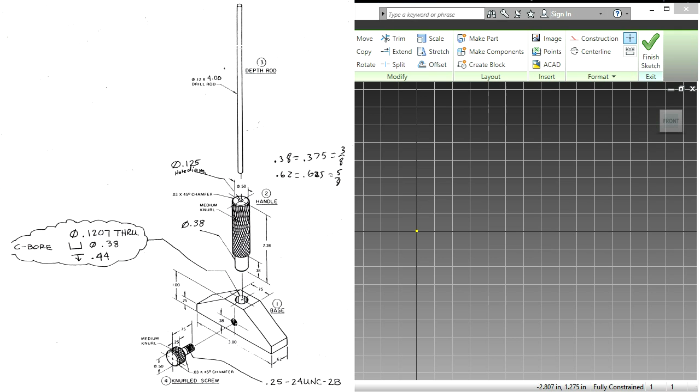A depth gauge is an assembly, so it will consist of a base, a handle, a depth rod, and a knurled screw. I'll start off with the base.

I'll make a line from the origin, 3 inches, go up 0.25 inches, and do the same for the other side.

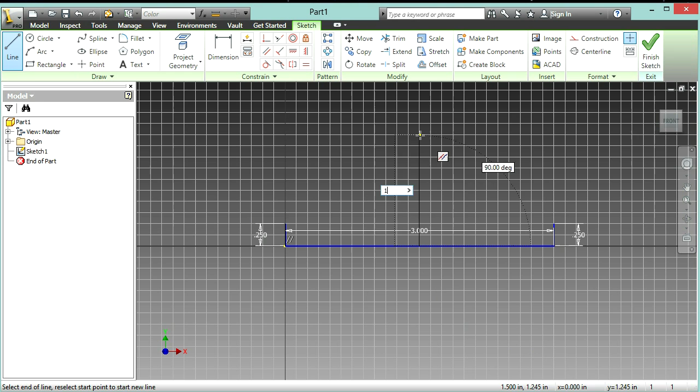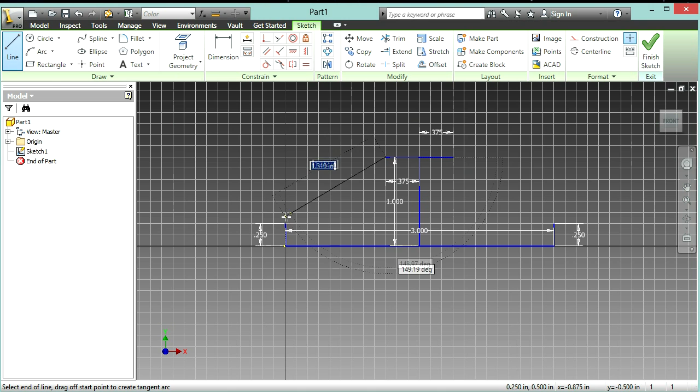Now I'll make a line up from the midpoint, 1 inch, and make a line horizontally 0.375 inches this way, and another one with the same dimension in the opposite direction. Now I'll connect these 2 points, and do the same with the other side.

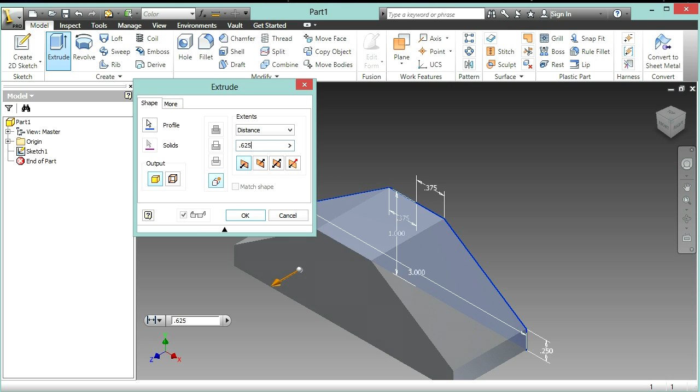I'll extrude this, select both of my profiles here, and extrude it 0.625 inches.

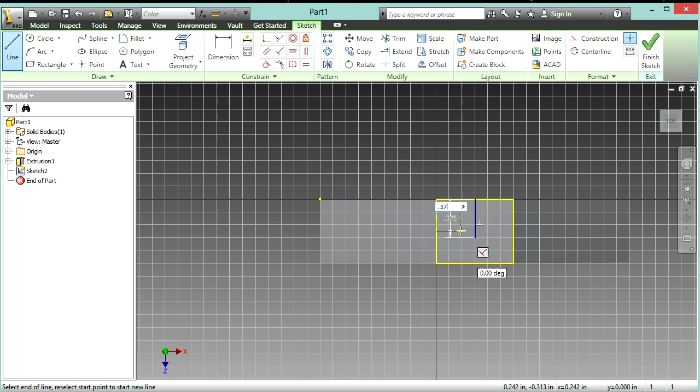Now I'll make a sketch on the top plane for a hole, and the sketch will be just 2 lines: 0.375 down from the midpoint and 0.375 across from the midpoint, and where they meet, I'll just trim this line here.

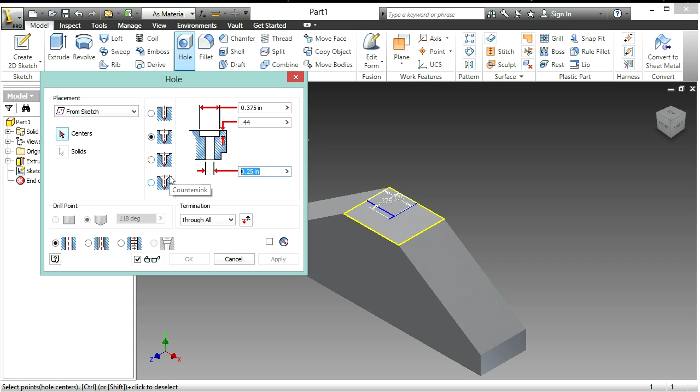Finish the sketch, make a hole. Here it'll be a counterbore hole. Select counterbore, it'll be 0.375, and here it'll be 0.44 down, and then 0.1207 on my through hole diameter. I'll select this point right here, hit OK, and as you can see, you have a counterbore hole right here.

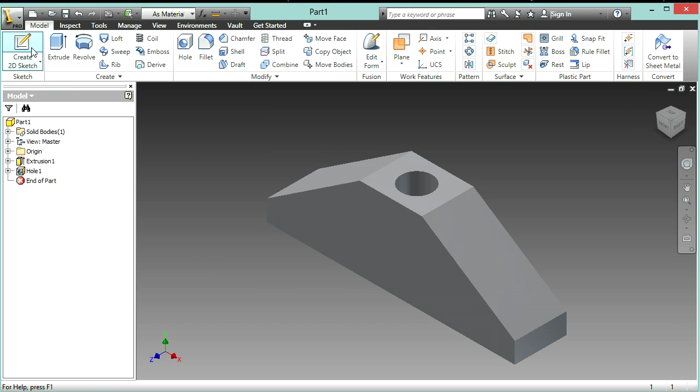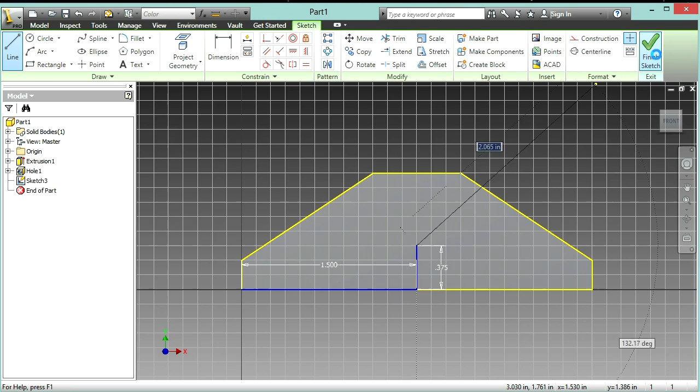Now we're going to make another sketch on this front face for another hole. For this hole, we'll go from the left side over 1.5 inches and up 0.375 inches. Finish our sketch, make another hole.

This one will be a drilled hole, and it'll have a distance right here. I'll click on this point. It'll be 0.5 on our distance and 0.25 on the diameter, and our drill point will be flat.

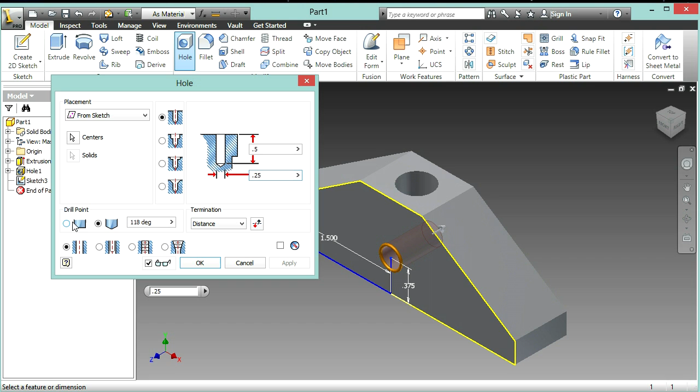Hit OK, and now we'll want a thread on the hole right here. So you'd click on the thread button under the modify tab. For location, we'll select this hole right here, and under specification, we'll select 0.25 as a size since it's a 1/4 inch diameter hole.

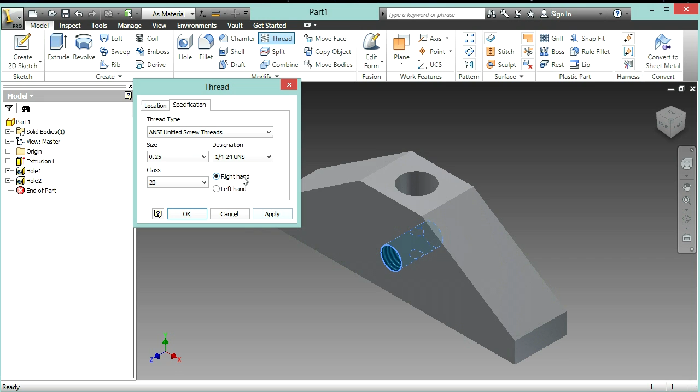Class 2B hole, and this one will be a 1/4 24 UNS, and right hand is fine with this. Hit apply, and now you have your base completed.

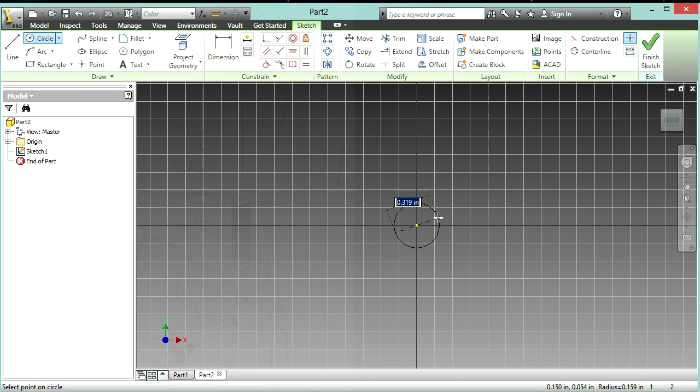So now we'll go and make another part. We'll start with our depth rod. You would make a circle that is 0.125 inches in diameter and extrude it 4 inches.

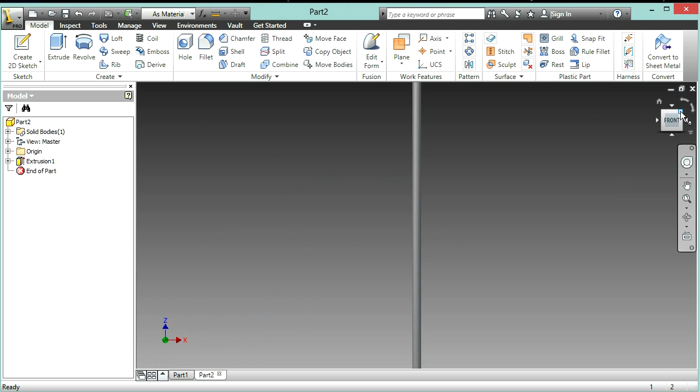I'll just make the view a bit more realistic. I'll set this as my top view, and set this as my home view, and select fit to view. So now that's our depth gauge part.

We'll create our next part, which will be our handle. To start off, we'll make a circle that is 1/2 inch in diameter. Finish the sketch and extrude it 2 inches.

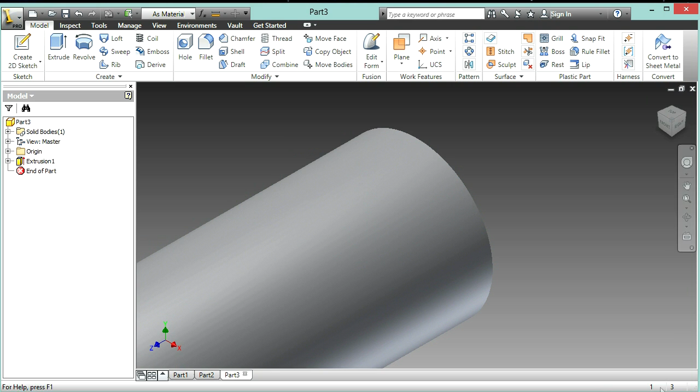I'll make the view, set this as the top view, since that's what I would want in my assembly. It'd make it a lot easier to draw. And I'll set this as my home view right now.

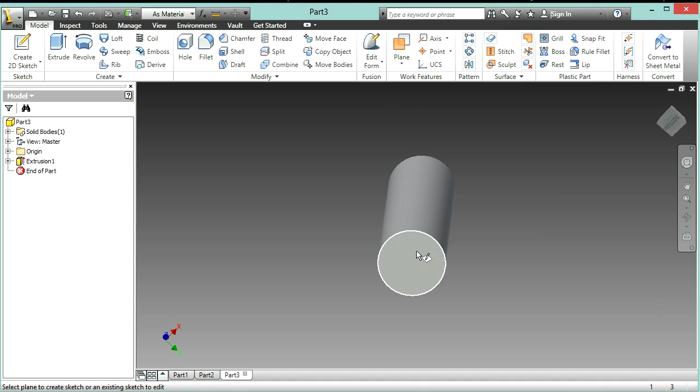Next for our handle, we'll pivot. We'll go over the cube, you can drag it down, create a 2D sketch on the bottom part of this part, and make another circle that is 0.375 inches in diameter.

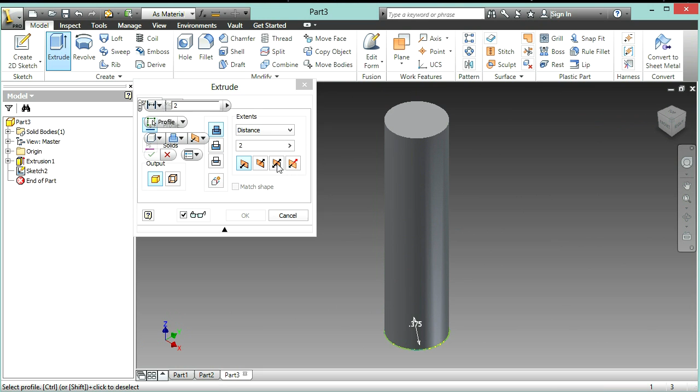Finish the sketch there, and extrude that. You'd select your circle right here, do that to 0.375 inches. So now we'll have a hole on the top face, so create a 2D sketch on the top.

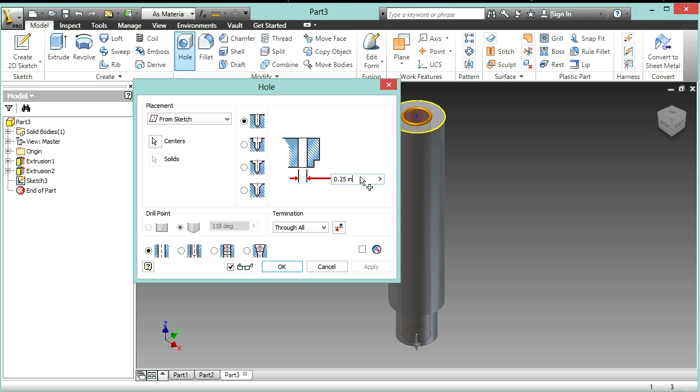We have our point right here, that will be the center point for our hole. Select the point right there. The diameter of this hole, it's a drilled hole through all, it'll be 0.125 inches.

And now we'll chamfer the edge right here. Chamfer this edge, and under distance, we'll select 0.03 inches.

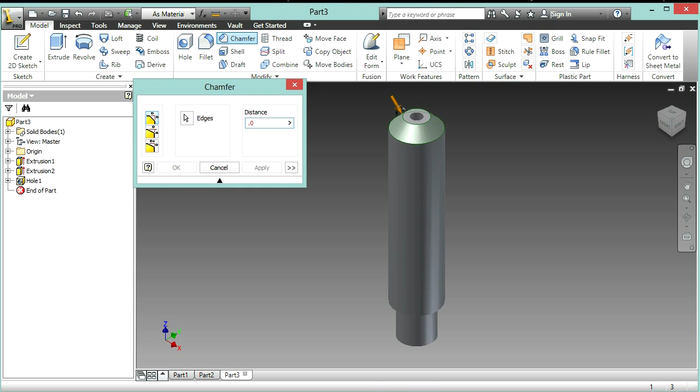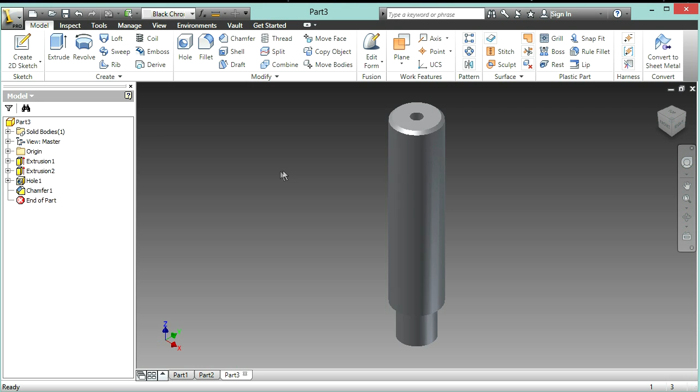And now for this part, we'll want a knurled finish. For that, we'll just select a material that we'd want. I'll have a black chrome finish for my part. Now select the face that I want, which would be this face right here.

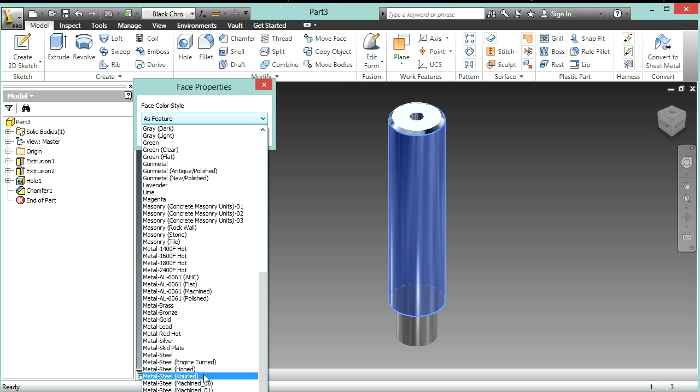Right click on it, press properties, and under face color style, you'd scroll all the way down until you see metal steel knurled right here. Click on that and press OK. You now have a knurled finish on your part.

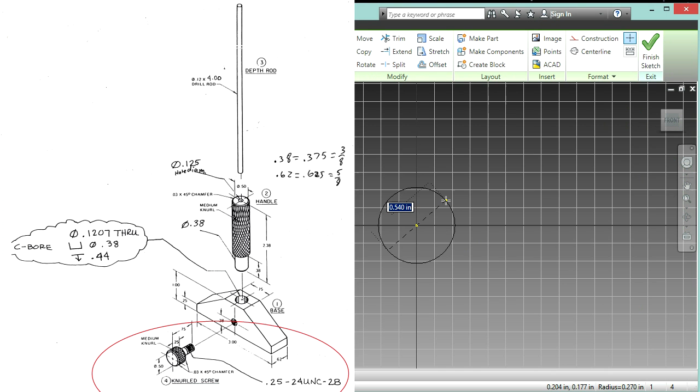And now we've completed a handle. So now for our next part, we'll create the knurled screw. For that, we'll have a circle to start off with, a 1/2 inch diameter circle. Finish the sketch and extrude it 1/4 of an inch.

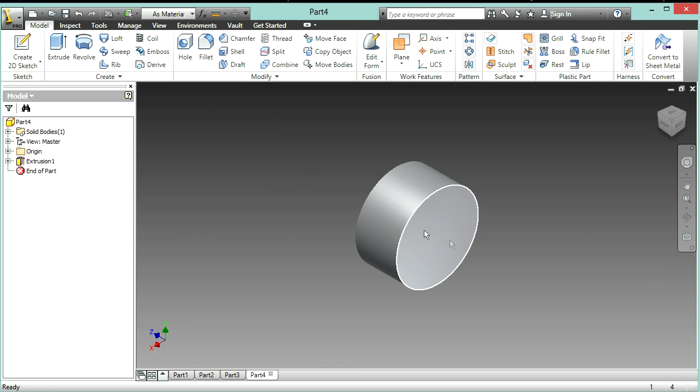And now we'll want to go over to this side, create another sketch, make a circle on the origin that is 1/4 of an inch in diameter. Finish the sketch, hit extrude, click on the smaller circle, and extrude it 1 inch.

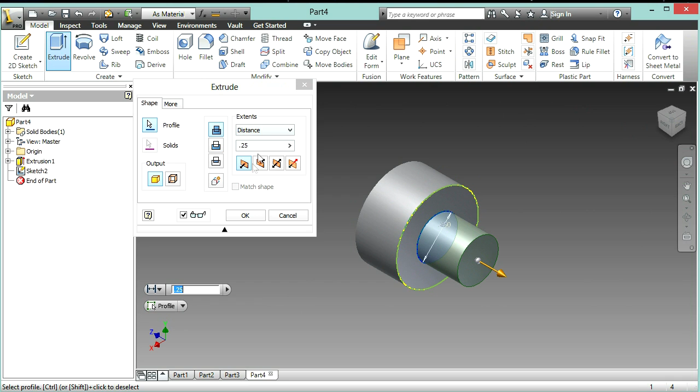Or sorry, not 1 inch, I'll edit that real quick. Should actually be a quarter of an inch. Right there.

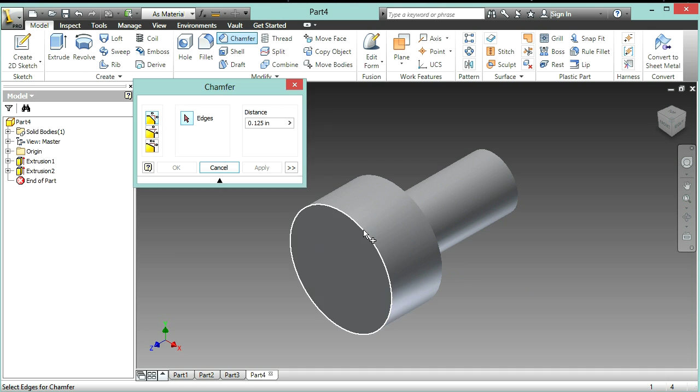And now we'll also want to chamfer an edge right here, or this face, and under distance we'll select 0.03 inches.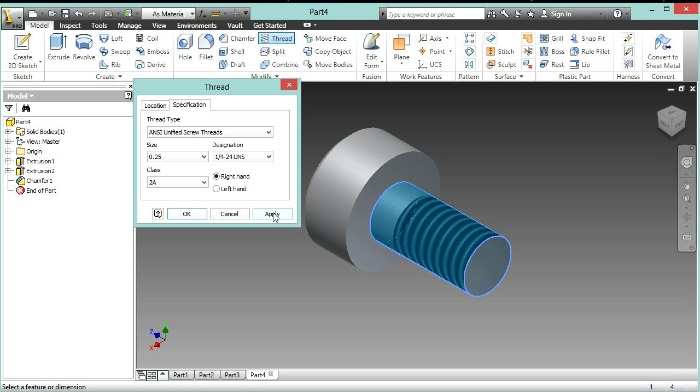And we'll also want to put a thread on this screw right here. So you could select this smaller area right here, and uncheck the full length box. I'll go over here to make it a bit easier for me to tell how I'm doing on this. For length, I'll select 0.375 inches, and under specification I'll have a 2A class 1/4-24 UNS thread. I'll hit apply, and I have my screw almost done.

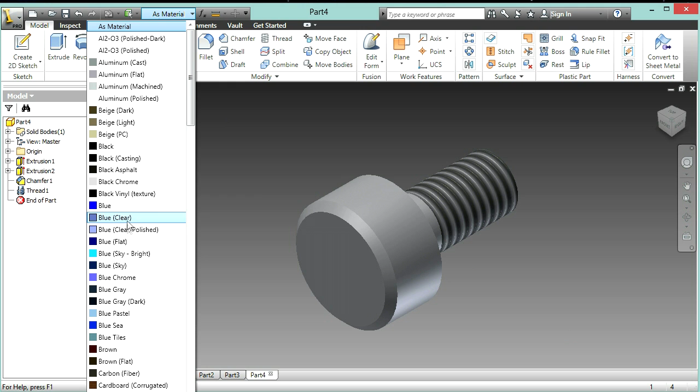I'll select another material right here, since I need to have a knurled finish on this screw. So I'll select blue chrome, and now select this face, right click it, go to properties, click on that, and scroll down till I find metal steel knurled. Hit OK. Now I have my knurled screw.

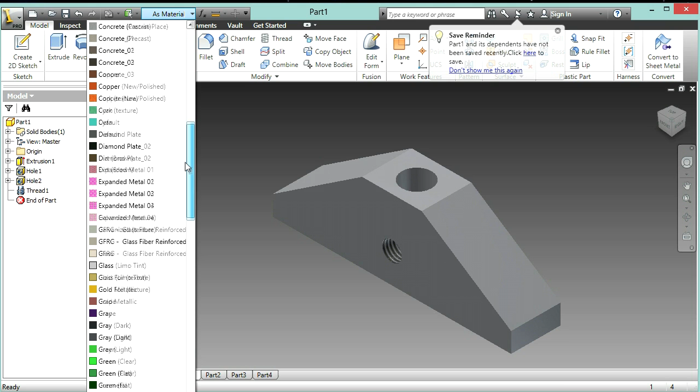And I'll just put some color on these parts too. I'll have this be a gold metallic, my base, and I'll have my depth rod be a polished aluminum.

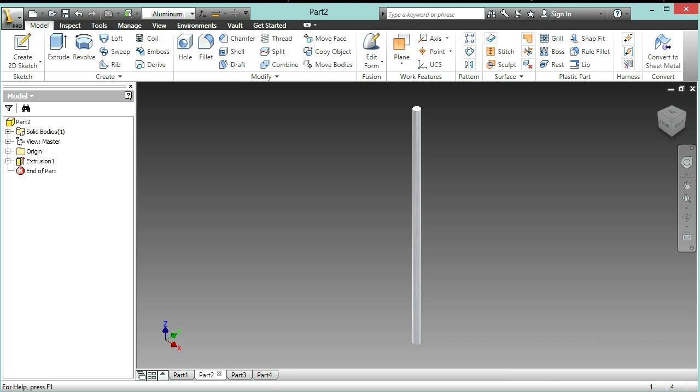And I'll go ahead and save my parts. So I'll go under the file menu, save as, or go under save, save all, and then go ahead and save my parts.

So now we'll go ahead and make a new assembly. Under the drop down menu on new, you can select assembly.

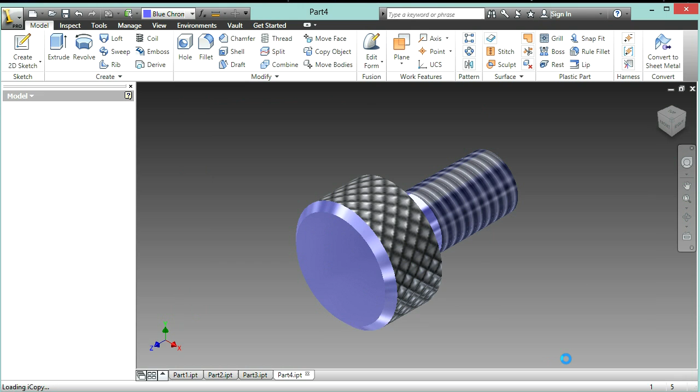And we'll go ahead and start creating the assembly, the full depth gauge assembly. So you'll hit place, select all of these parts, right click, hit done.

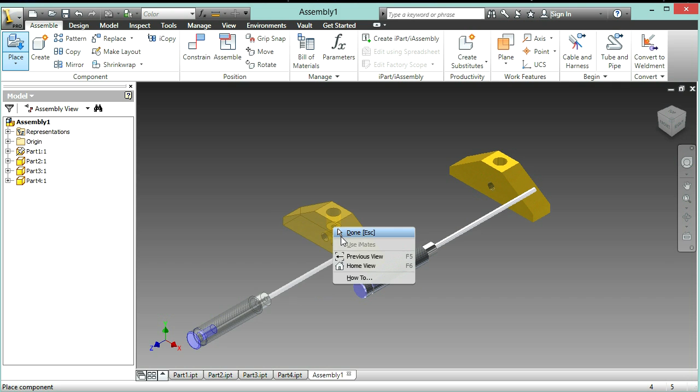So most of these parts need to be rotated. I'll just start with the one that doesn't and start mating that. So I'll constrain the constraint, constrain it, constrain the inner circle.

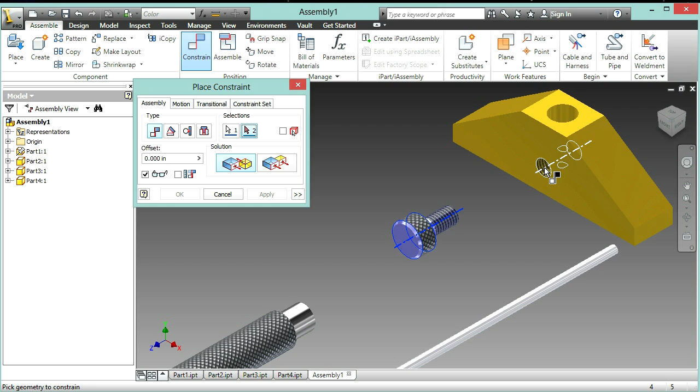You'll know when, because there's a center line in there. So I'll constrain the inner circle to the inner circle. Hit apply. I'll back out of that so I can see the rest of the screw.

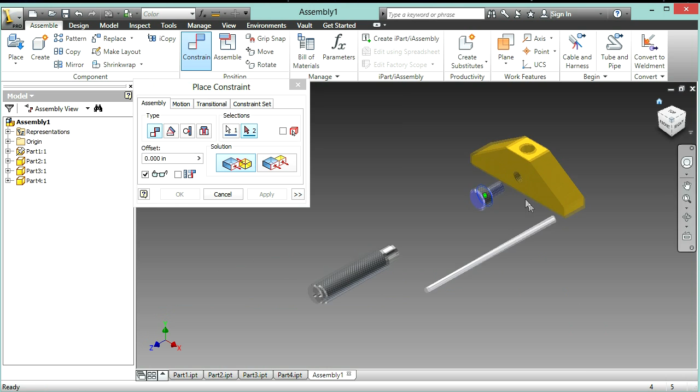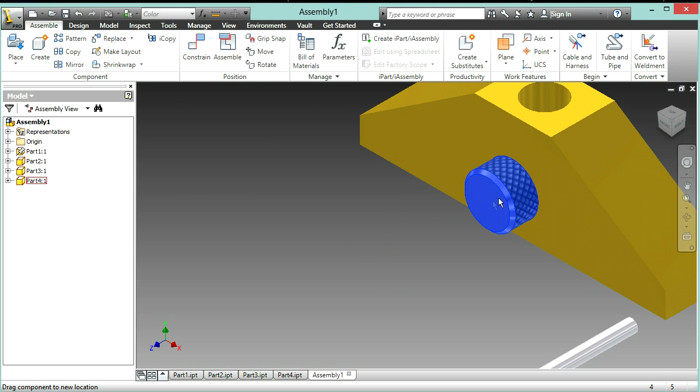And now I'll go over to the right side view, constrain this part of the circle right here to right here, and I'll have an offset of 0.125, or not an offset of 0.125 actually. I'll just constrain it again here. Don't put an offset on it.

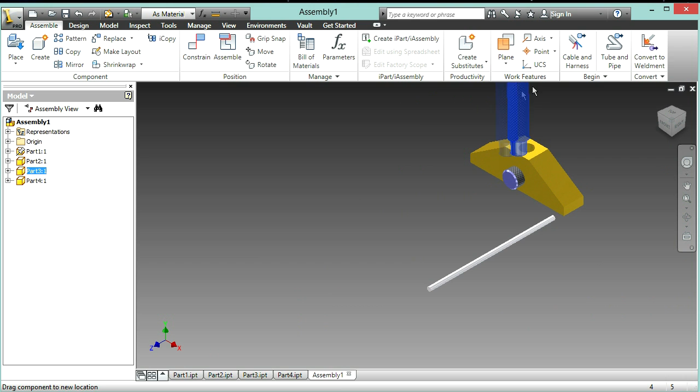And now I'll go to the handle, right click, rotate component, rotate it till it's approximately good, and I'll start doing the same kind of constraints that I did with the knurled screw. So constrain 2 inner circles, and now I'll drag this up a bit so that I can constrain this circle right here to this one.

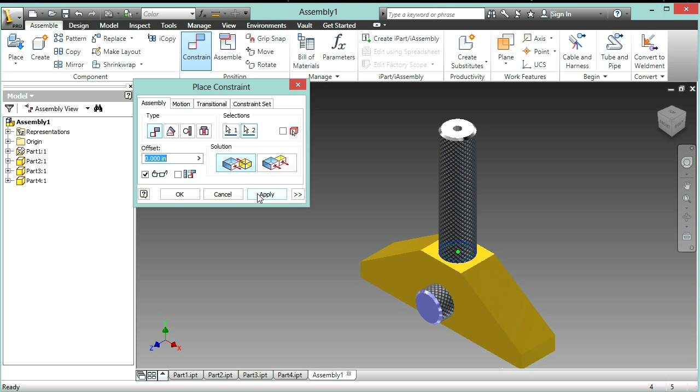And now I'll rotate the depth rod, and I'll constrain that inner circle to the inner circle right here.

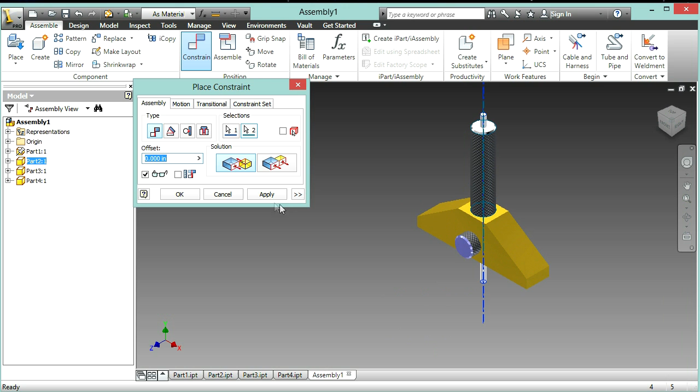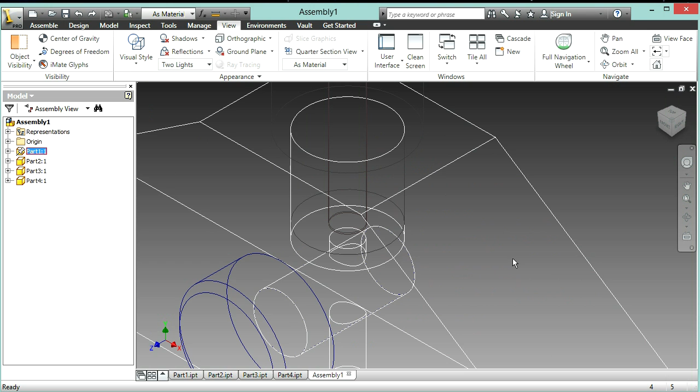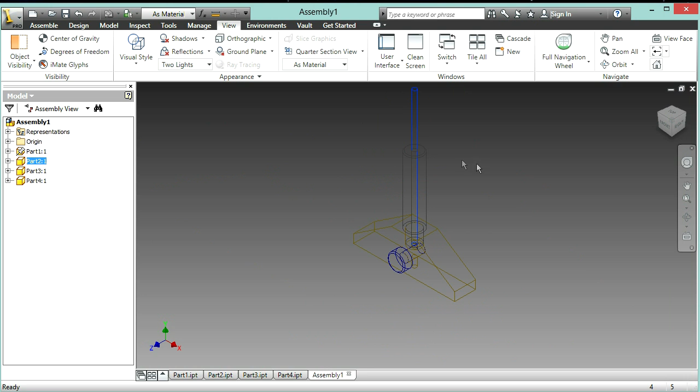And now I'll go to my View tab, and under Visual Style, I'll select Wireframe, and from there I'll drag up so that my depth gauge is not hitting the screw. This looks like it should be fine right here. Go back to my Visual Style and select Shaded, and go back to my home view.

I'll save this assembly, because I'm going to make a presentation out of it. To do that, you'll go to New, and under the drop down menu select Presentation. You'll select Create View, select your assembly, and under Explosion Method select Manual if it's not already selected, and hit OK.

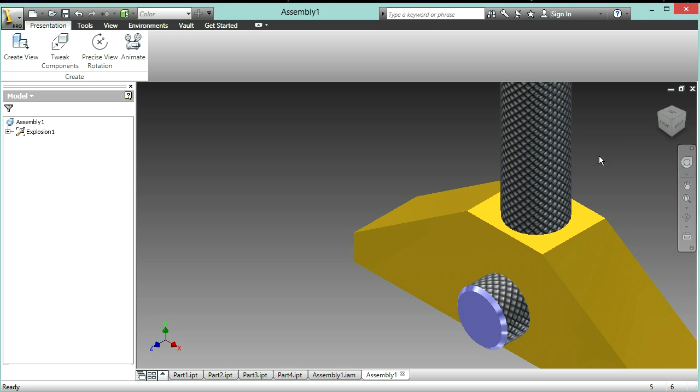And you may want to zoom out so that all of your parts are visible. And now you'd want to select Tweak Components. So I'll select my knurled screw, select Tweak Components, select my knurled screw.

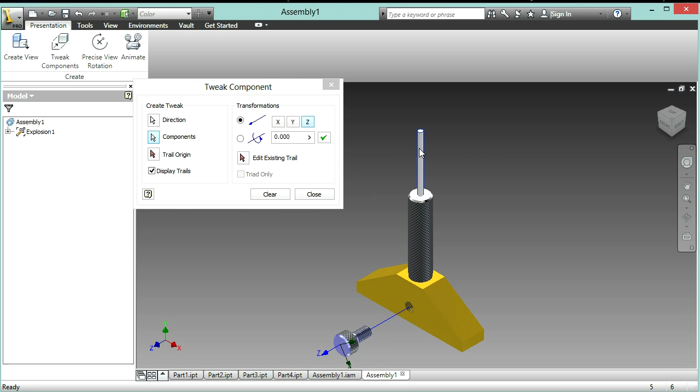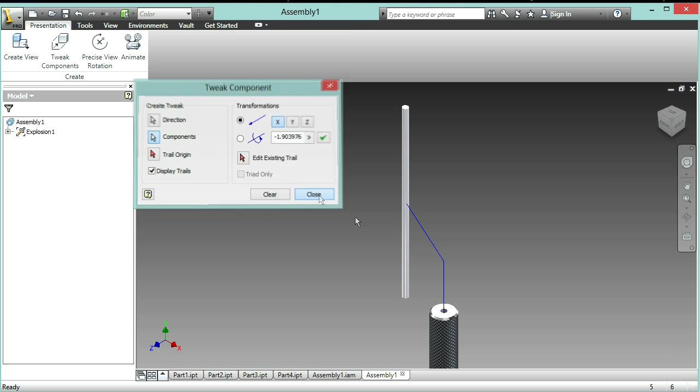Drag it out, and I'll drag, hit close, select Tweak Components again, drag this up and out, hit close. I'll go back to my home view, hit Tweak Components again, and I'll drag this.

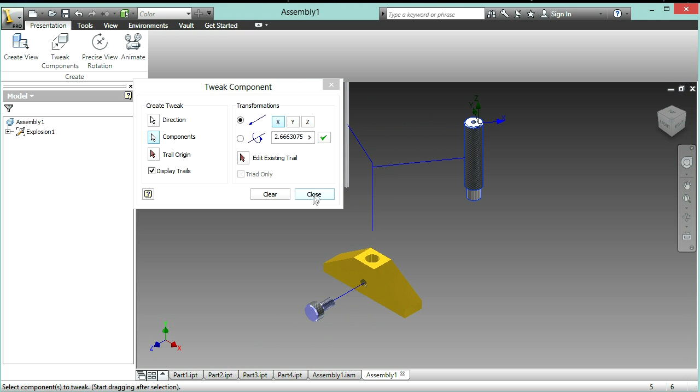You'd have to select the right face, so you drag it up, and now I'll have a transformation on the X direction to the right. I'll hit close, go back to my home view, and now you can select animate.

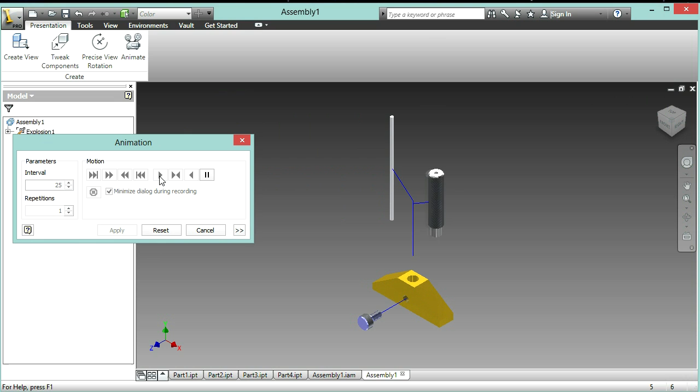I'll drag this over so that you guys can see the presentation. Hit play forward, and as you can see, it's all going into place. The depth rod is now coming in.

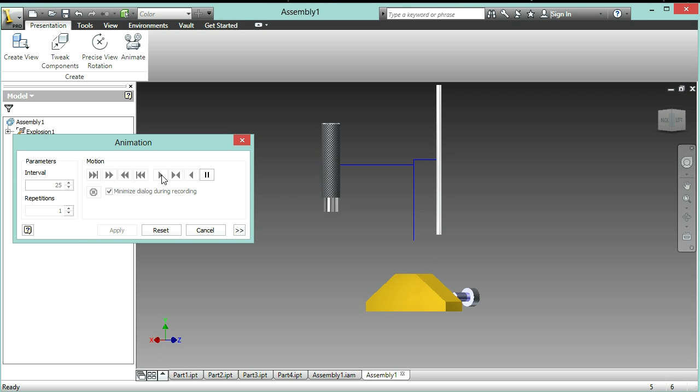And right here, if I play this again, you'll see that I made a tiny mistake when I was putting in my depth rod, because it goes straight through the handle. So I'll go ahead and change that.

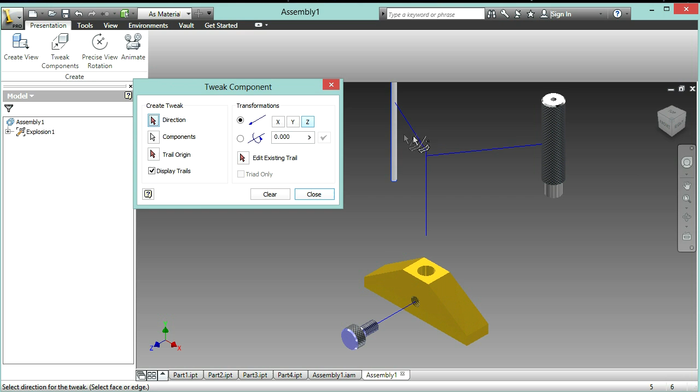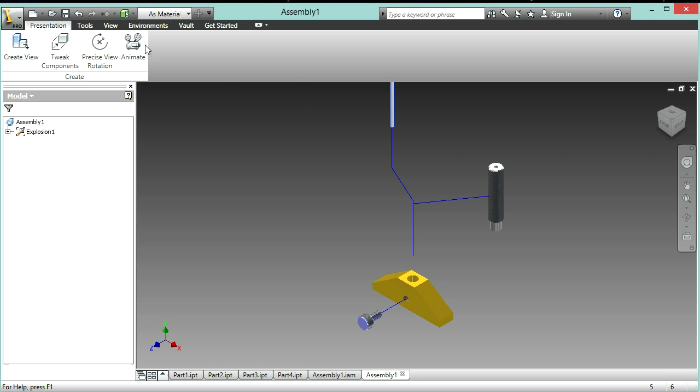And for my depth rod, I'll just drag it further up. And now I'll animate from there.

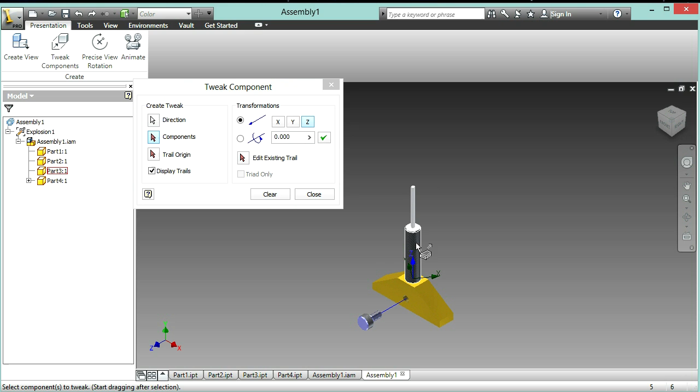So I've restarted, partially restarted my animation, my presentation. So I'll click on this, drag it up, and then click on this part right here, drag it up also, and now I'll have a transformation on.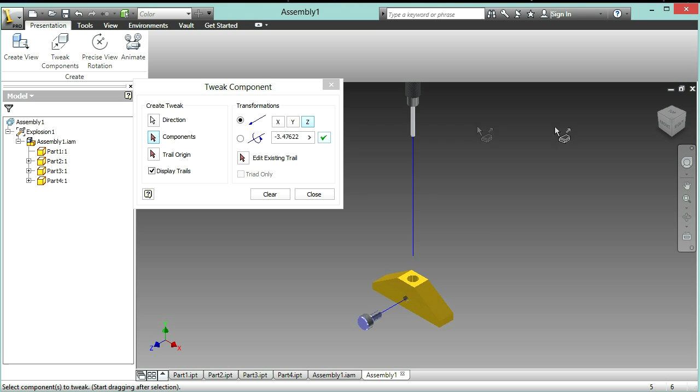And yeah, I'll drag this, specifically drag this one up more, drag my depth rod up, and have a z-axis movement, and I'll shorten the distance right here, and now I'll start my animation again.

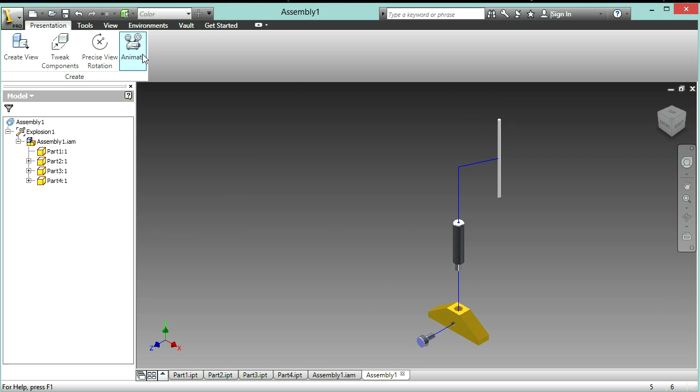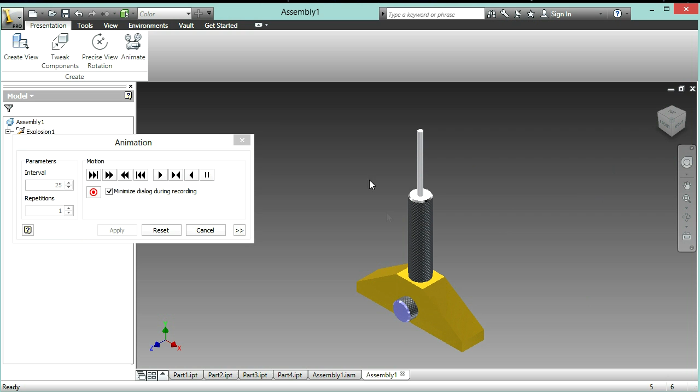And as you can see, it goes right into place, and there's your final depth gauge assembly.